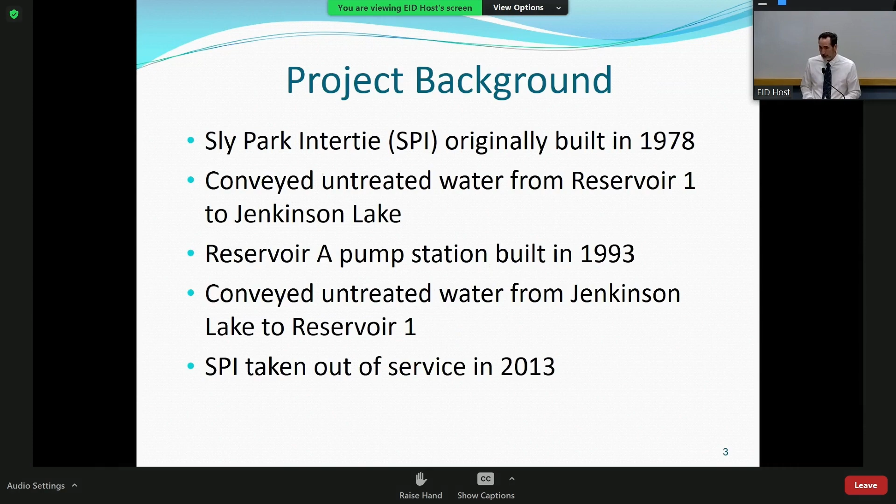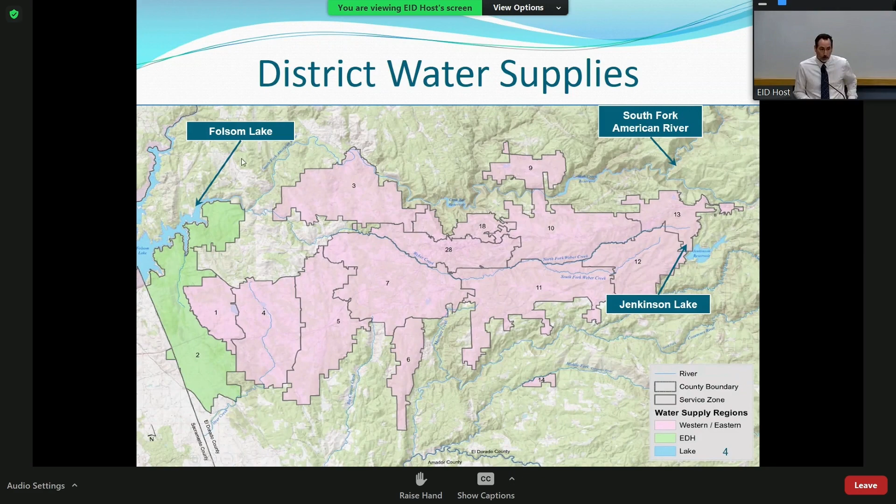The Sly Park Intertie is one of only 3 major pipelines connecting the north and south transmission systems here. It's also located on the furthest east and the highest elevation, which allows for the most flexibility and efficiency in delivering water. The SPI project would reestablish the connection between Reservoir 1 and Reservoir A, and this goes a long way for efficiency and supply throughout the entire system.

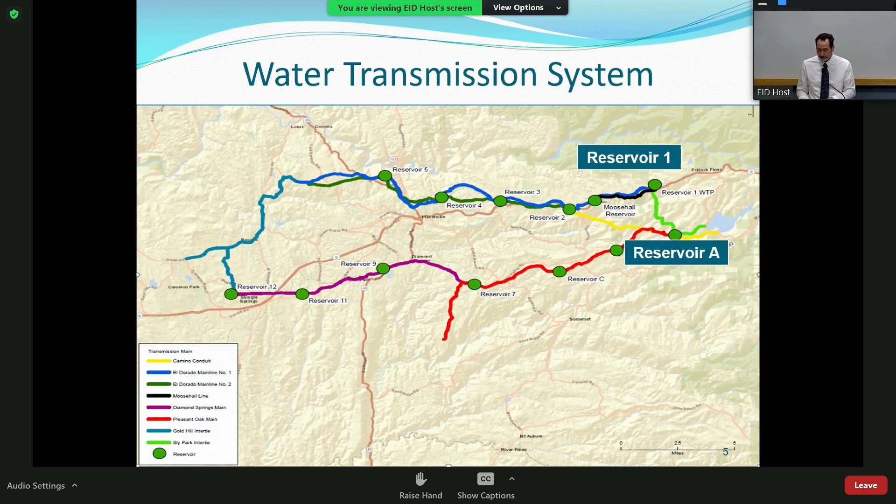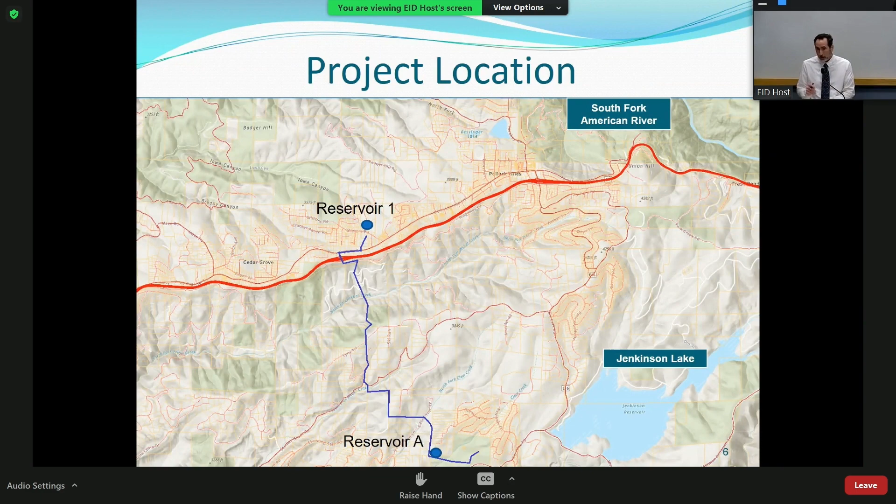Reservoir 1 is located in Pollock Pines off of Pony Express Trail, and Reservoir A is located below Jenkinson Lake off of Sly Park Road by the U.S. Forest Service Sierra Springs Fire Station. It's approximately 6 miles from Reservoir 1 to Reservoir A.

Next slide, thank you. The project objectives are to improve drinking water reliability with a bidirectional pipeline, provide uninterrupted drinking water supply during an emergency or a scheduled plant shutdown. This means that Reservoir A or Reservoir 1 will be able to supply the entire system. Reduce energy by maximizing gravity flows and utilizing new high-efficiency pumps. Lastly, to improve water quality and reduce the scale and cost of water quality treatments.

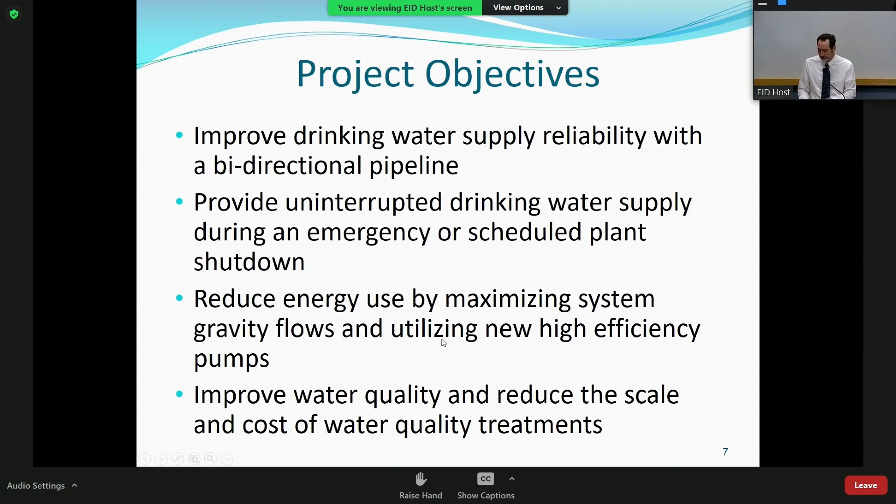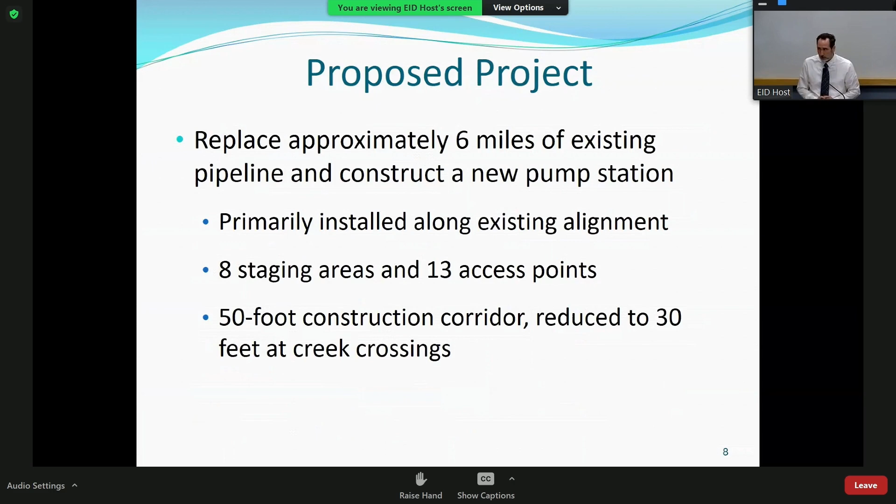The proposed project would replace approximately 6 miles of existing pipeline. It would be primarily installed in the existing alignment with 8 staging areas and 13 access points. The construction corridor would be approximately 50 feet wide, that's 25 feet on each side of the pipeline, and that would be reduced to 30 feet wide, or 15 feet on each side, over creek crossings.

Segment 3 at the bottom of the map is located entirely within the Reservoir A facility, which includes the new pump station. Lastly, segment 4 is the last half mile of the project from Reservoir A up to the distribution system by the Sly Park Environmental Education Center.

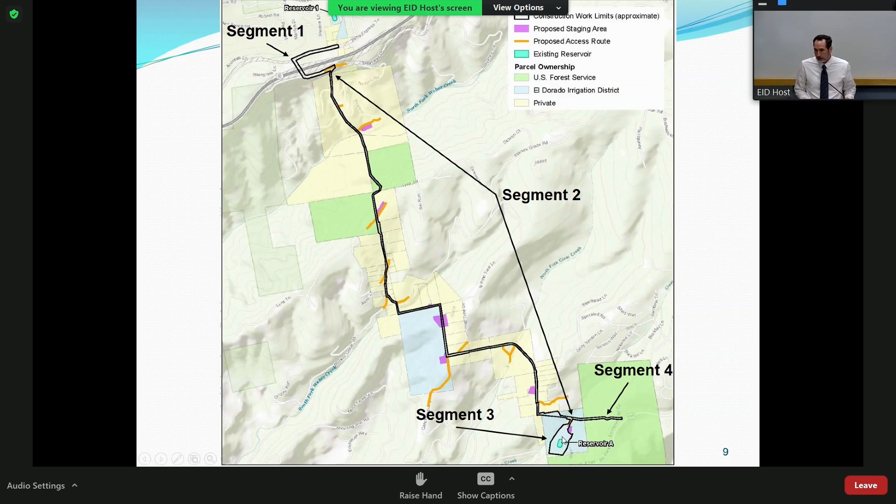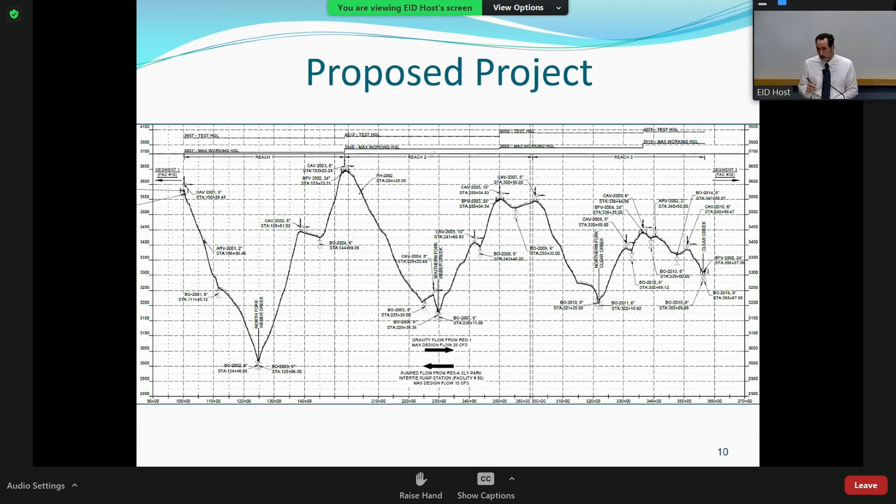Typical construction sequencing would involve removing the vegetation. The old pipeline would be excavated and removed. The new pipeline would be placed in the trench with new bedding material. The trench would then be backfilled and compacted and restored to original contours and reseeded for ground cover.

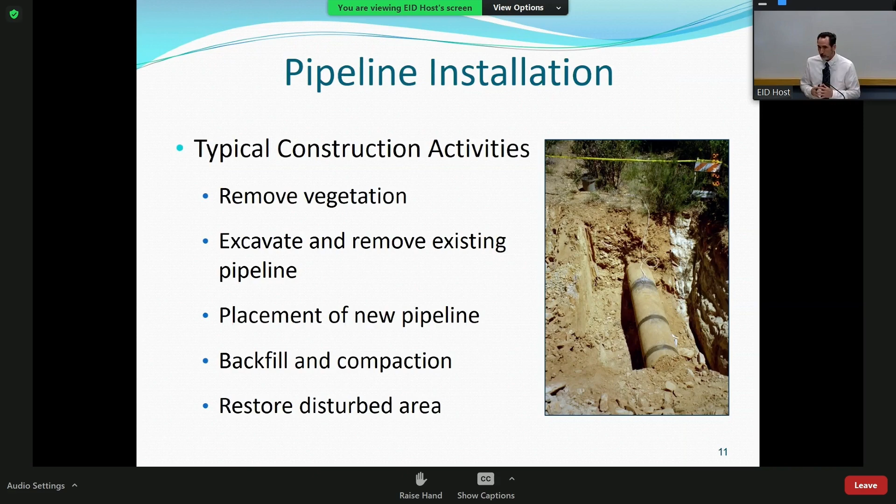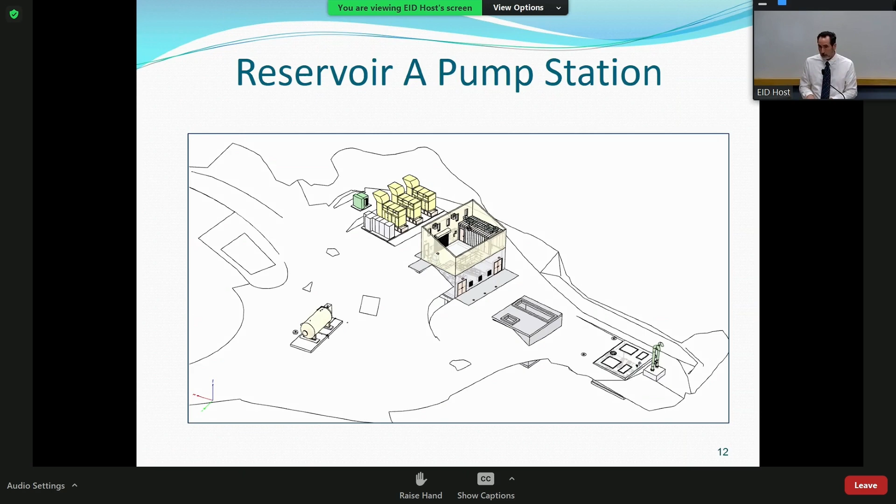As I mentioned before, Reservoir A is about 450 feet lower than Reservoir 1, so we're going to use new high-efficiency pumps to get that water back up to Reservoir 1. Additionally, there are backup generators to provide power in cases of planned or emergency power outages.

The project is scheduled to start this summer, and with typical pipeline construction advancing 120 to 160 feet per day, that would get the project completed substantially by the end of 2025, with pipeline testing and then placed into service in 2026.

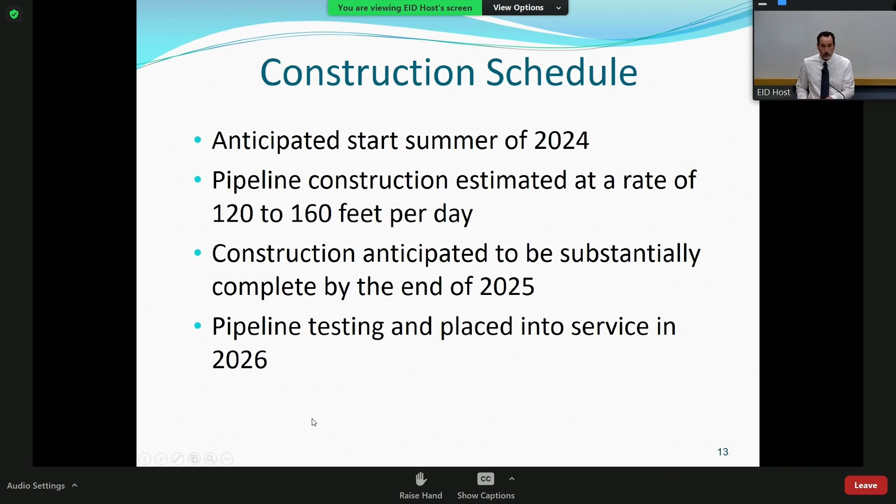So that's the brief outline of the project and overview. We're now going to move on to the environmental review process. The California Environmental Quality Act, or CEQA, is intended to inform decision makers and the public about potential environmental effects, identify ways to prevent, avoid, or reduce those significant environmental impacts, and foster public participation and promote interagency coordination.

The CEQA review started over a year ago, with a notice of preparation to solicit input from the public and public agencies on the scope and content of the EIR. We had a public scoping meeting on February 15th, 2023.

Then this January, we released the draft environmental impact report for a 45-day public review and comment period. We also had a public meeting to get input from the public on February 7th. The notice of completion for the final environmental impact report was released just a couple weeks ago, on March 27th.

The district has had ongoing public outreach throughout the entire environmental review process. We have sent out notifications to local residents, met some local residents at their homes and property to discuss the project directly with them, and had public meetings to discuss the environmental documents and get input.

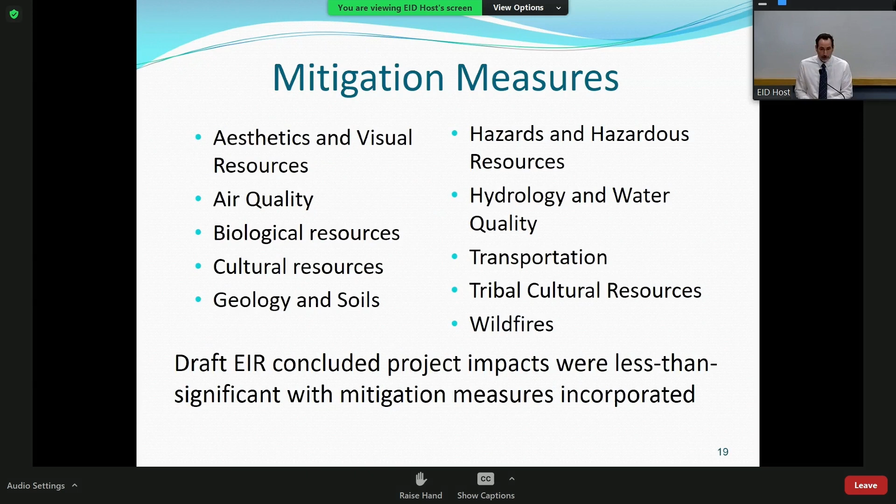The draft EIR also included a mitigation monitoring and reporting program, or MMRP. This MMRP identified specific measures and the timing of these mitigations for each of the impacted resources. The draft EIR concluded that project impacts were going to be less than significant with these mitigation measures incorporated.

So the district received 5 different comments during the 45-day public review period. We received 1 comment from the California Department of Fish and Wildlife regarding biological surveys, plans and impacts, construction personnel training, and mitigation measures. We also received 4 different comments from adjacent property owners, regarding construction noise, access, traffic, and duration, and biological impacts and fire protection.

The final EIR for the project includes the comments received and any changes made to the draft EIR. District staff reviewed and carefully considered the comments received on the draft EIR, and a response to each comment is included in that final EIR.

It was determined that no significant new information was received with the comments, therefore no substantial changes were made to the draft EIR. The final EIR also includes any revisions to help clarify the language in the draft EIR, and it includes the MMRP, which describes how the project implementation will go and how those mitigation measures will be recorded. Lastly, the final EIR affirms that there were no changes in the findings or conclusions of that draft EIR.

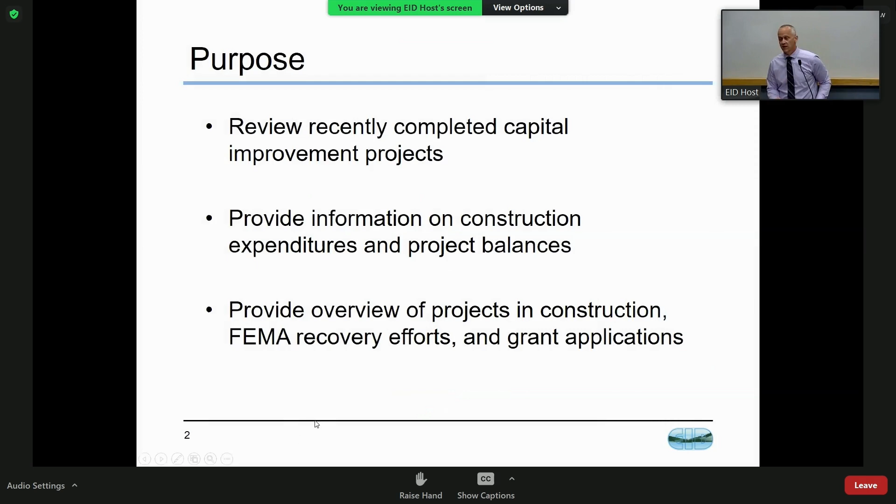So today we're going to review a couple things. First, a review of recent completed capital improvement projects, as well as a summary on the expenditures and project balances for those projects. Then we will also provide an overview of projects that are ongoing and in construction, as well as a brief summary on FEMA recovery efforts and ongoing grant applications.

This is a summary of the projects that we have completed to date, or at least since our last report to the board. In total, that's about 4.7 million in construction dollars.

Over this period we have performed quite well. We are averaging about 2.2% in change orders, which reflects the diligence of engineering staff. You'll notice the change orders vary quite a bit - there's one that's fairly large, and change orders vary by complexity, budget, and location of the project. That one where you see a 22.5% increase in change orders was in one of our wastewater treatment plants - we'll get to that as we get down the road. But typically we expect change orders. Staff plans for up to 10% when we come to the board. One of our consultants thinks that anything under 8% is a grand slam. Again, it depends on if we get into existing utilities and a busy site - the industry average can get as high as 15 to 18%. It really depends on the site and the budget and location of the project.

So I have a question about that. This particular 22.5% seems to me, as a red flag, and we have had problems before. So you said this is completed now? It is completed. So when we get to that item, I'll discuss and give you some background on where we ended up with that increase in change orders. Okay, you will explain that. Absolutely. Okay, thank you.

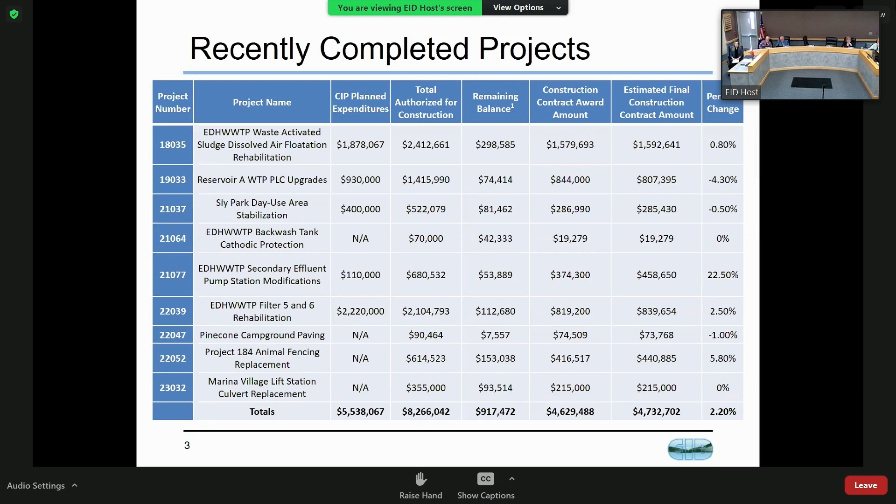So moving on to our first project. Next slide. I always like the acronyms that we use - so the El Dorado Hills Wastewater Treatment Plant, Waste Activated Sludge, Dissolved Air Flotation Thickener, you could lowercase DAFT. So this has been an ongoing project.

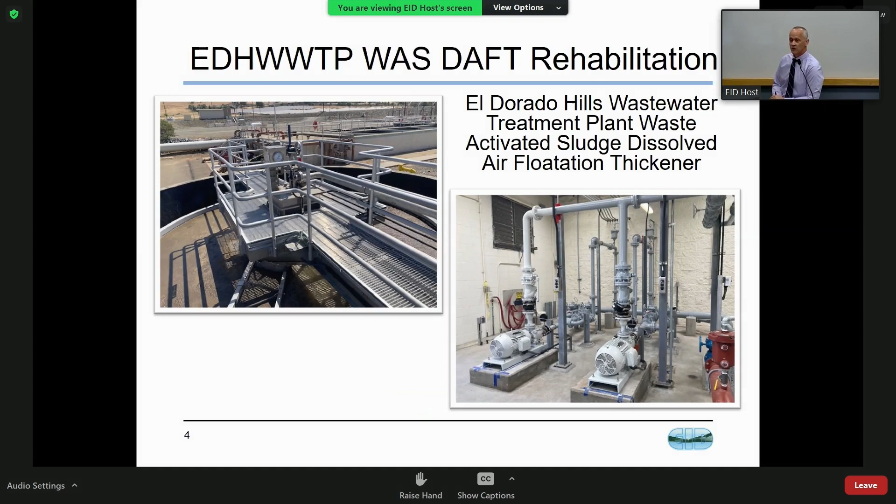So, next slide. Planned expenditures on this project was 1.8, almost 1.9 million. Total authorized for construction came back at 2.4 million. A lot of these costs you'll see are quite a bit higher than the planned CIP expenditures, and recently that's been due to general inflation we've experienced on our projects. One of the major drivers that affected this project and several others is the electrical cost - I think the electrical estimate came back almost double what the engineer's estimate was, and that's been pretty consistent across most of our projects.

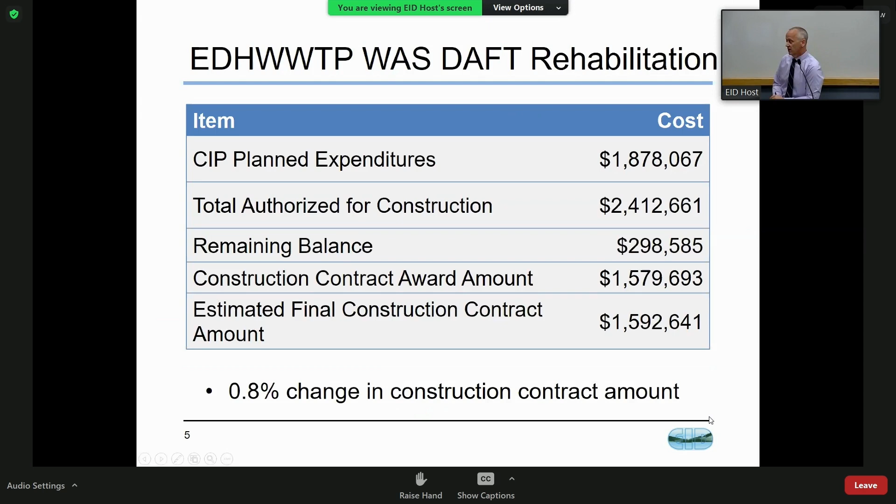That being said, we were able to manage quite a few change orders on this project with the contractor, and worked out some intricate details with that electrical system, and also a realignment of some of our existing facilities that were inaccurate on our as-built drawings. But regardless, we got to the finish line with about $300,000 still in contingency funds, and a total change order of just less than 1% on the project.

Next project, please. I threw in a couple of our smaller projects as well - some of these we don't necessarily come to the board with. I believe the Sly Park day use was, but you'll see two others that were authorized under the GM spending authority. The Sly Park day use area has experienced some pretty severe wave and boating action on the west shore there at Jenkinson Lake.

You can see in the top left-hand corner the condition of the existing shoreline prior to this project. Staff went out for a brief design and then received bids from 3 contractors to restore that, to excavate, stabilize the bank, and then place riprap. So you can see them mid-construction in the top right and the completed project there on the bottom.

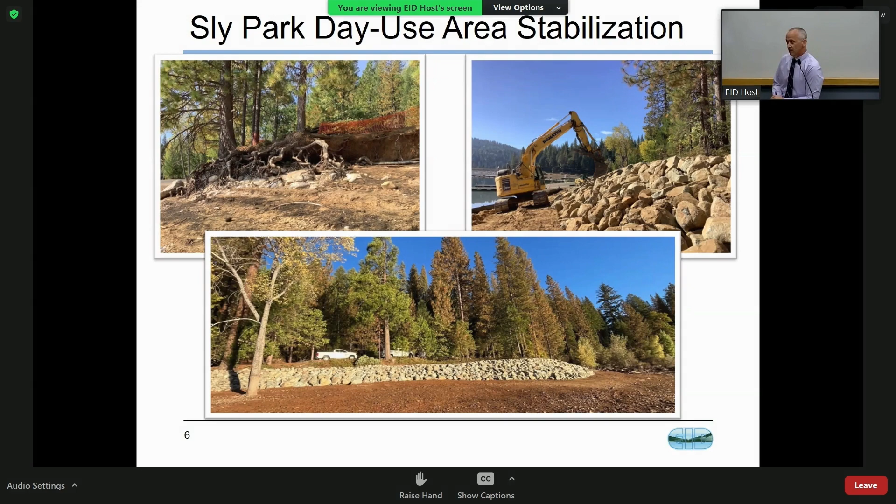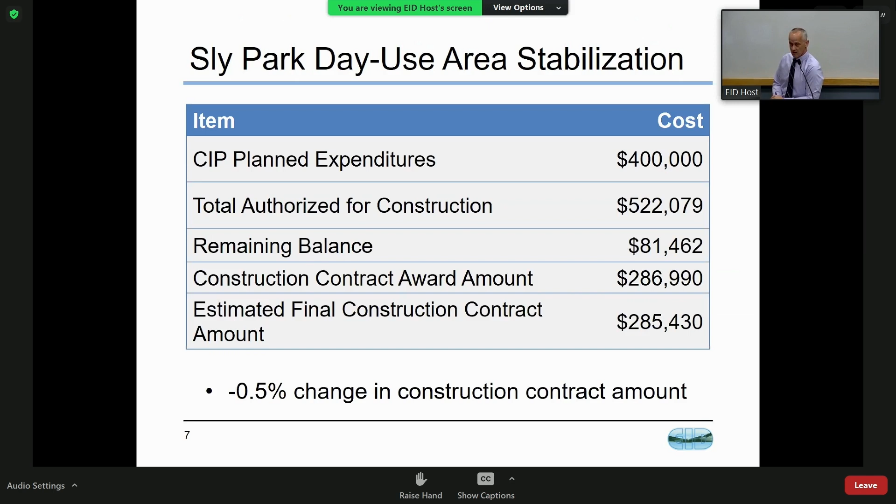Again, negotiating with the contractor, there were some minor site changes throughout construction, which actually reduced the bid price of this project by about 0.5%. So again, a pretty successful project.

I threw this one in again as it was not included initially in the CIP plan. It is included under our wastewater treatment plant ongoing projects. But I threw this on here because water supply is not the only branch of our services that have steel tanks. This is a bolted steel tank that is our backwash recovery from our recycled water at El Dorado Hills. Plant staff brought this to our attention in that when the tank was originally constructed, it did not have a cathodic protection system equipped on the tank. So again, we're trying to extend the life wherever we can of our facilities, taking whatever notes we can from our ongoing steel tank issues.

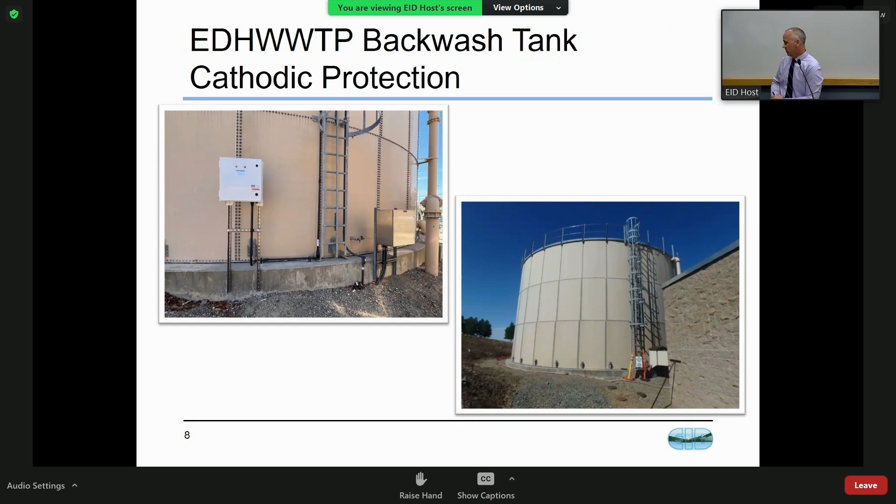So staff approached us, we received some initial estimates from similar projects, approached the GM under his spending authority to do a small design, and we were actually able to find a pretty economical solution. Genevieve, you can go ahead to the next project.

So we were planning on about $70,000 in repairs, and we were able to meet and identify a solution with a vendor for just under 20 grand. It came in exactly at that bid, so there are no change orders on that project as well. As we're looking to prolong our assets and come up with economical solutions, I wanted to highlight this project.

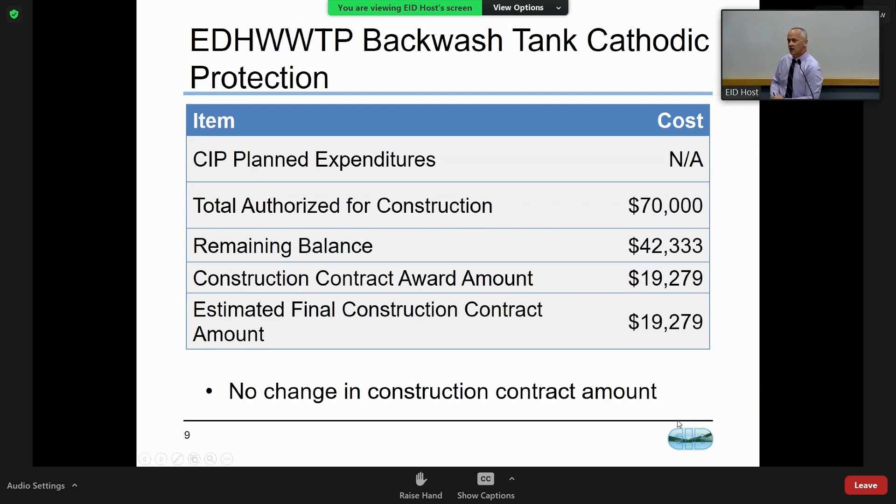Now for the problem child. This is the secondary effluent pump station modifications at our El Dorado Hills wastewater treatment plant. We had a couple issues go on when we were under construction on this facility. First and foremost, construction change orders fluctuate based on the scope, location, and complexity of the project.

What this was is the pipe you see in the bottom right - we were trying to expose this pipe and retrofit it with an air box so that it can release bound air from our secondary clarifiers during high flows. What was happening is the pump station just on the other side of this was getting airbound during high flow weather. That pump station pumps all of the flow for the treatment process, either to the storage reservoir or to our filter processes for recycled water or discharge to the adjacent creek.

So when that's not functional, we lose about - actually there are 2 pump stations - we lose half of our capacity to do that. Operations staff has to rent temporary pumps, and it really puts them in a bind when we get into those high weather flows. So definitely a critical project.

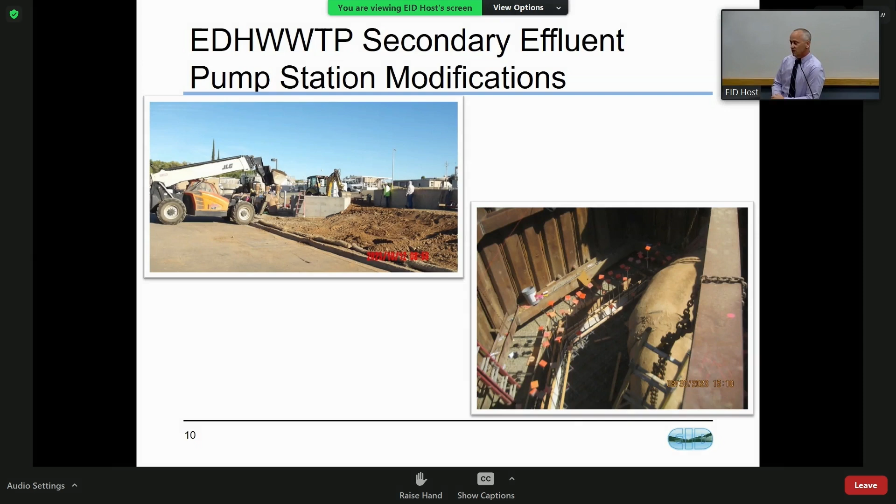So again, planned expenditures, we planned for just over 100,000. We saw a large escalation in labor right as this project was bid, and then another substantial change order of almost 80,000 for the rock pocket and changed site conditions once the contractor got on site. This is one we try to avoid, but given that complexity, industry averages for this project would be somewhere in that 10 to 18% range that you'd expect. So we're not too far off. However, we definitely want to continue to do better and get our records more in order.

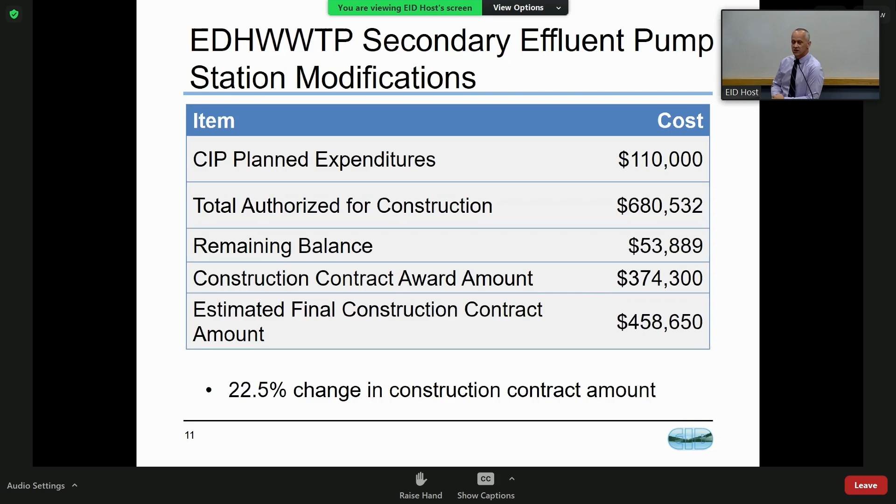Same plant, almost the exact same time, was the El Dorado Hills wastewater treatment plant filter 5 and filter 6 rehabilitation. I know Director Dwyer, I'm not sure if Director Anzini had been out there as well to see this facility.

I went back and looked at some of the photos on this. You've seen pictures of our tanks - this is basically an above-ground steel tank. The interior looked just like some of the tank pictures you've seen, where it was very corroded and degraded. So all new internals, all new epoxy paint. Really ended up being a very nice product, and this should last for another 15, 20 years.

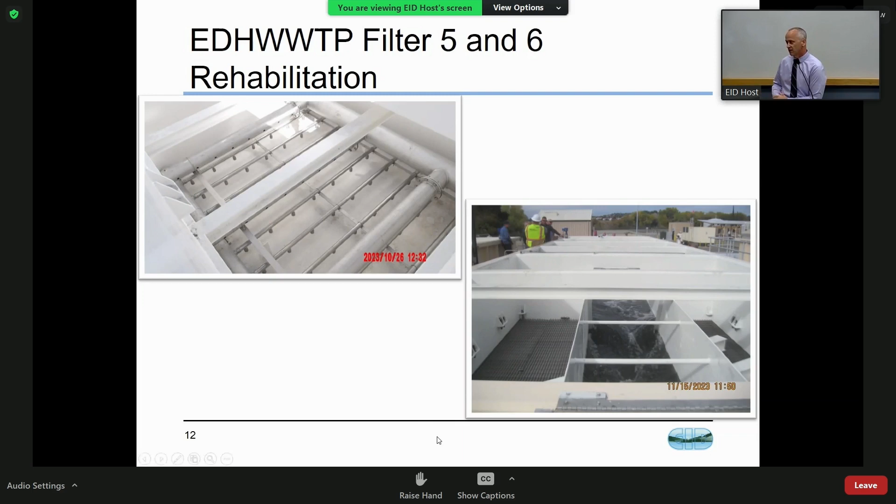We're going to do our best. So that's 2 out of the 6 - we still have 4 that we've got to program in and make sure that we at least do the recoating and possibly some of the internals as well, hopefully not on an emergency basis.

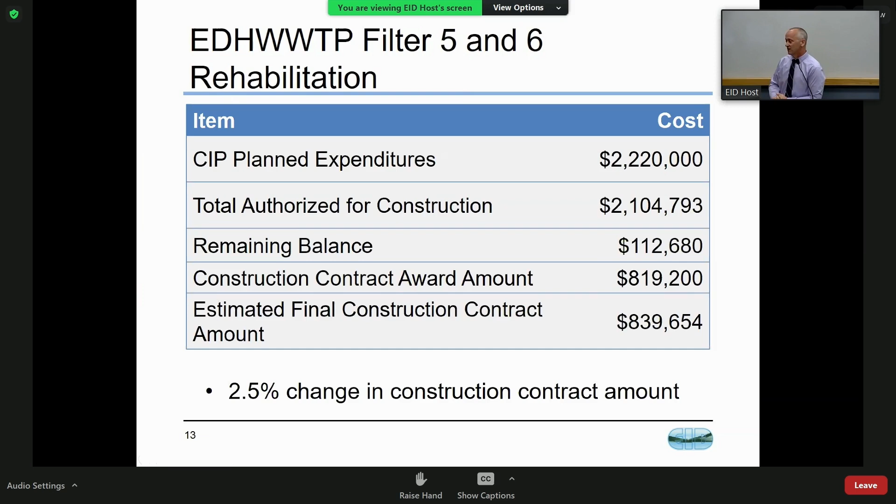Pinecone Campground paving - this is another project that within the first month I was at the district, I toured this one. The paved loop in the Pinecone Campground had significantly degraded over time - it was rutted throughout, with alligator cracking all the way through. So this was a project that staff put in to replace that paving.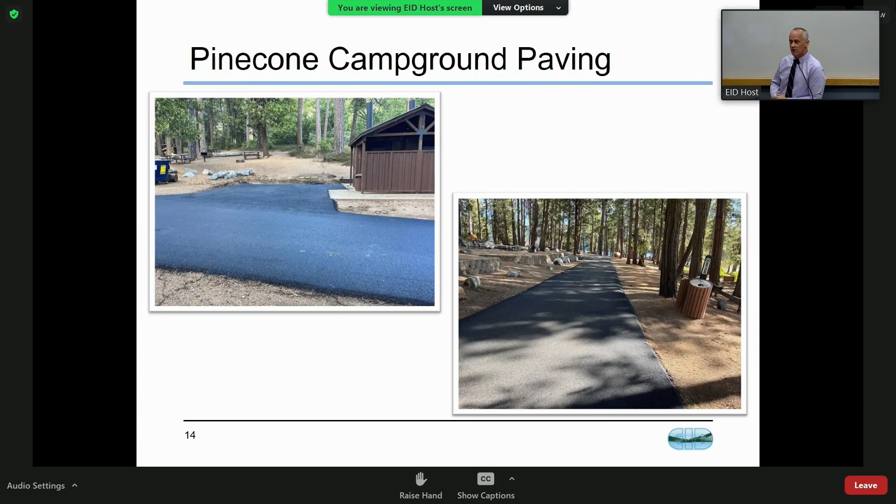We also upgraded the parking next to one of the restrooms there - you can see that in the top left - to make it ADA compliant, which it had not been in the past. So, pretty straightforward project.

And again, it came in right on budget. I think we had a couple deductions for what we planned to pave, and got us with a 1% under change order.

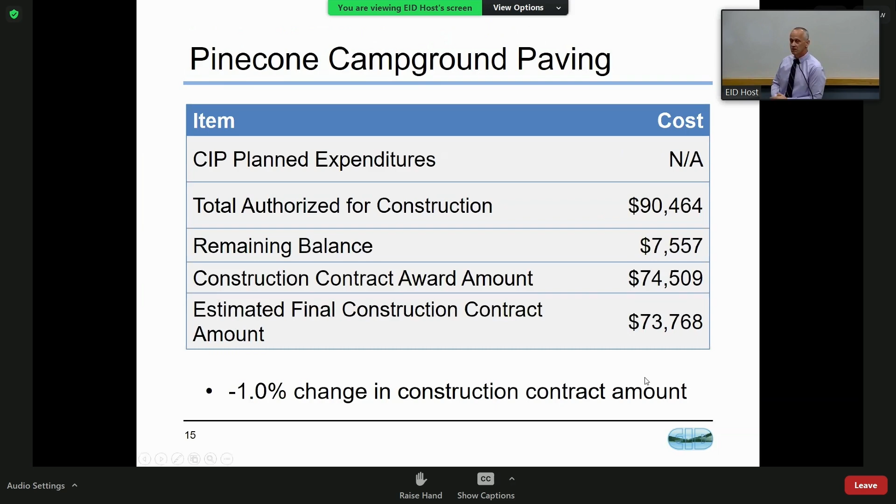Project 184, animal fencing replacement. There were several sections of our flume and adjacent fencing that were damaged during the Caldor fire. This is a FERC requirement that we maintain access fencing along the canal - I think there's about 1.6 miles of fencing included in this project.

It's pretty remote, pretty hard to get to terrain, and I think we had a couple issues. You can see in the top - actually, there's the fencing right there. It's 6 foot all along both sides of the canal. This is in the Mill Creek or Bull Creek area of the flumes.

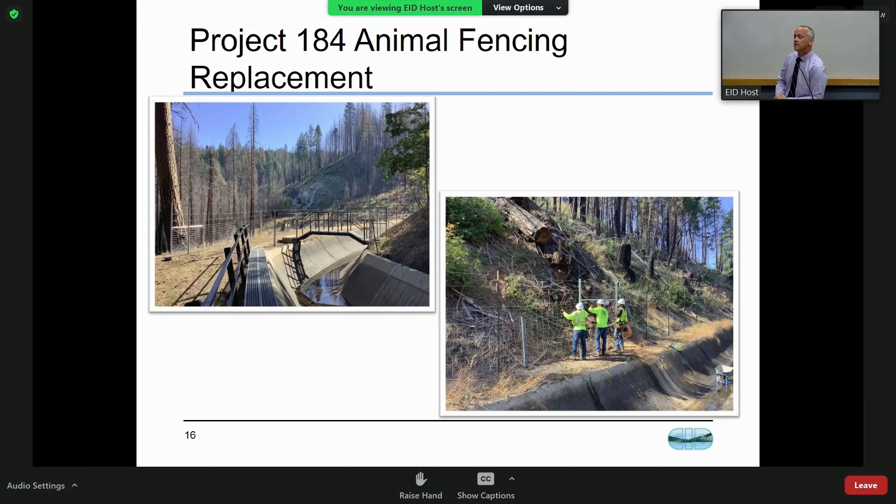Because the canal replacement - the damage done in the Caldor fire - is the cause that we had to remove some of the fencing to get access, are we using that as part of our insurance and FEMA recovery request for the fencing? It is, it is. So we will be pursuing reimbursement for this project as well, as part of that larger FEMA project - ongoing, it'll be a long time coming, right?

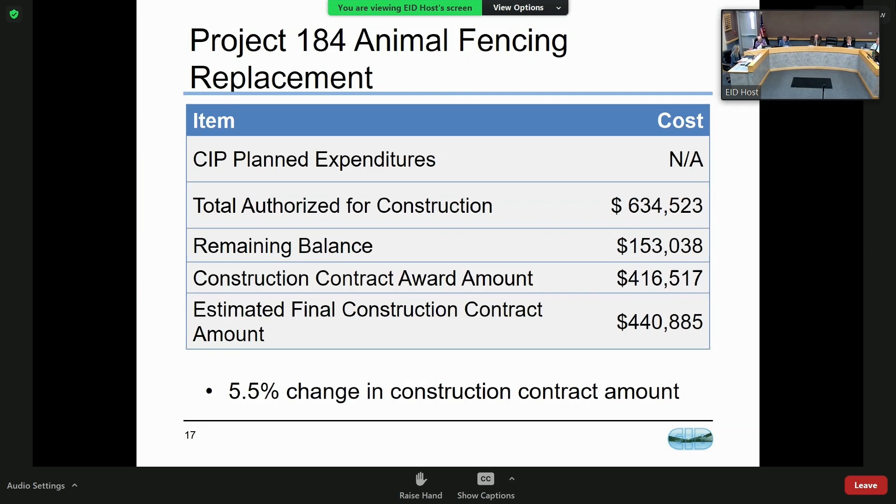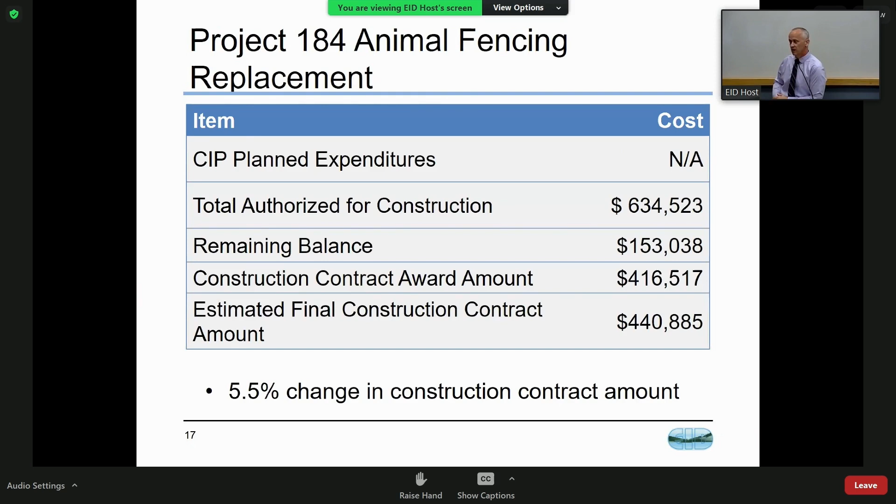Overall, there were some change orders on this project - I believe we added a couple animal crossings. It's hard to identify some of the changes in terrain until a contractor actually gets in there and adjusts how he's going to get the fencing to accommodate those, given the remote nature of that project. So that drove the change orders, and we came in just under 6% change orders that we will be pursuing reimbursement for.

Last project was the Marina Village Lift Station culvert replacement. In June, I believe, of last year, following the preceding winter storms, operations staff noticed some severe erosion of the upstream face of the culvert in the access road to the Marina Village sewer lift station. At the time, it had eroded up to about 8-10 feet along the 48-inch culvert that spanned this road.

The gravity line that went into the station was completely exposed and kind of hanging there in the air. So it really was a huge liability for the district. Staff issued an emergency contract, given the timeline before this year's storms, in order to get it done with SRC.

We bid the project, and I don't believe there were any change orders on this project. SRC was able to get in very quickly. You can see this was a pretty complex project.

The picture on the right shows those two I-beams holding both the 12-inch pipe that drains into this lift station, as well as the 12-inch force main that pumps out of this lift station, which remained active while we completed this project. Instead of the 48-inch corrugated metal pipe, which usually has 20 years of life, and I've seen as little as 10 or 12 years, we replaced that with two concrete pipes to hopefully give us more like a 50 to 100 year life on that access road and culvert structure.

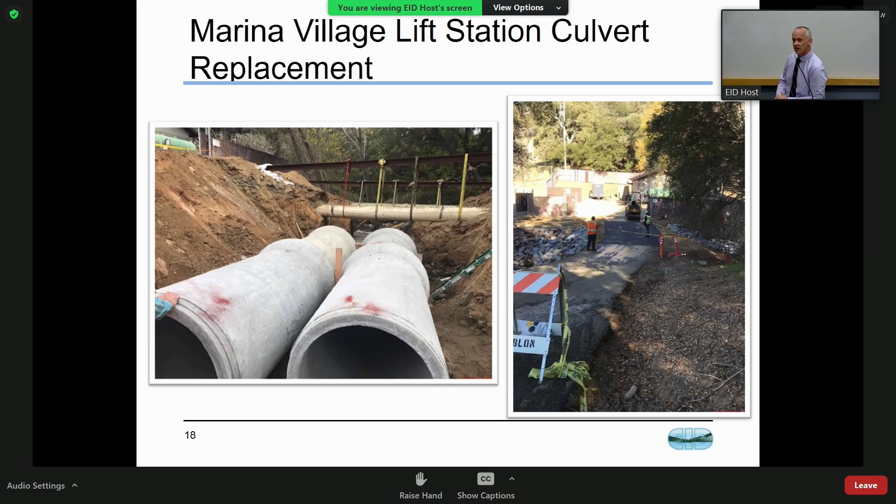Unfortunately, this project is not covered by FEMA or insurance because it's a road access issue, and that falls within different reimbursement buckets. But go ahead, Jen, next slide.

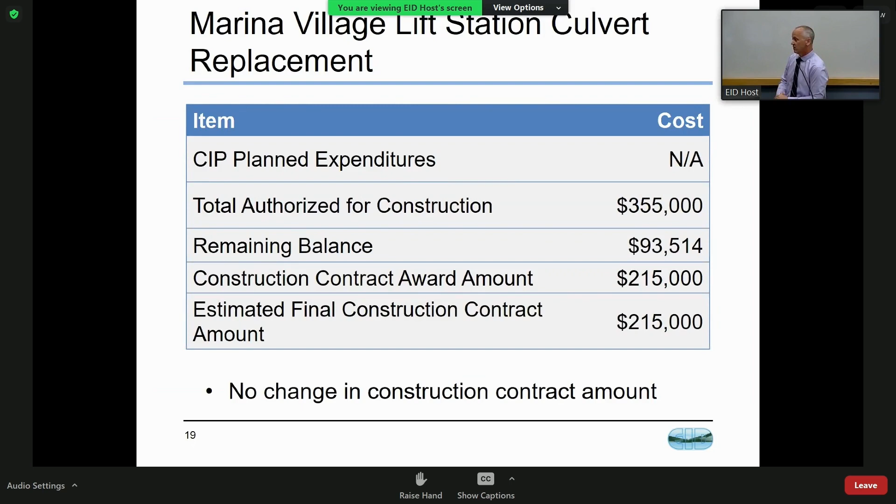Again, given the complexity of it, I think we got a pretty decent price, and no change orders on that project. So completed on time and within budget.

Following up on our active projects, staff is currently assigned 90 CIP projects, which is a pretty heavy workload for 6 engineers. Of those projects, approximately $70 million has been authorized by the board for funding. These are multi-year projects, so they don't necessarily correspond with our CIP plan and the annual budget, because they kind of roll from year to year. They include studies, basic design, construction, and equipment procurement, so all that's kind of wrapped up within those projects.

Specifically, out of those 90, we have 7 that are nearing completion. I would anticipate they'll be complete within the next 3 to 6 months, and those projects have a total authorized budget of $30.5 million. So we'll review those in the next couple slides.

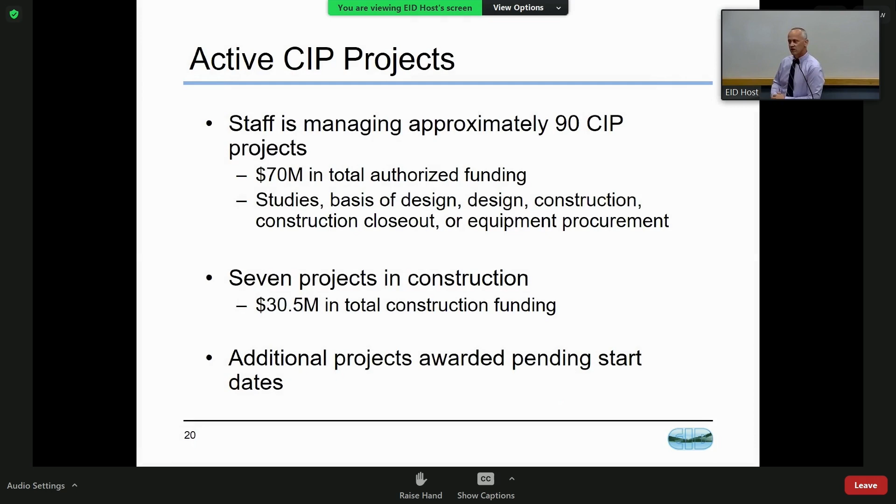There are additional projects that have been awarded and will be going into construction, such as our FEMA generators, Kipple Lake Well, or the campground well. Those are not included in this, but will be as we start or proceed to construction, as we start the next update.

So the largest of these next projects is Motherlode Force Main Phase 3. Again, this was an emergency project to replace the sections of Motherlode Force Main that carry a good portion of the outlying areas of Placerville down to El Dorado Hills, to our Deer Creek wastewater treatment plant.

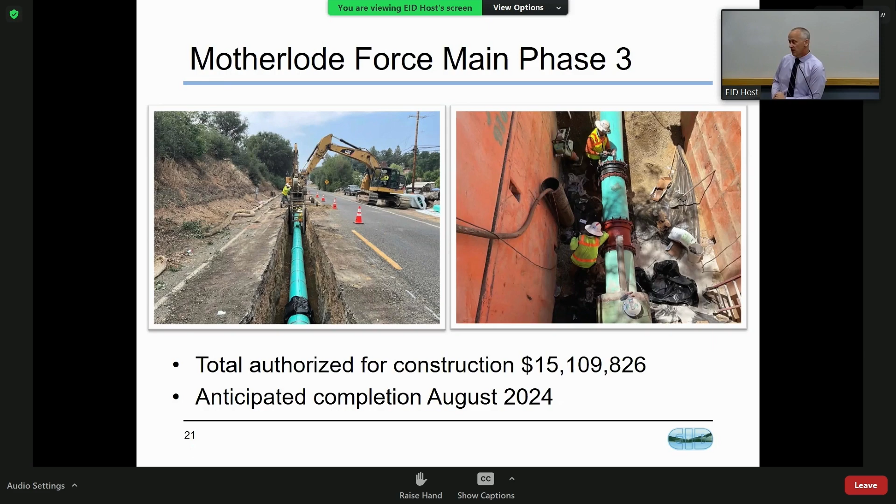This is composed of really 3 bridging projects along that alignment. I believe Phase 3A and 3B are 100% complete at this time. Paving still needs to occur on those two sections, and Phase 3B needs to also be tied into our system. The contractor will be mobilizing in the next week or two to work on Phase 3C, which is approximately 50% complete. We're anticipating the contractor will be wrapped up with tying everything in and final paving probably in August of this year.

Today, yeah, I wasn't sure if it was this week or next week. Again, that's been a really good partnership with Teichert to date.

Forebay / Drop Off Road waterlines. This is actually 2 different water line sections, the Forebay water line and customer service lines, which were completed last year. However, final paving for that segment has not been completed. We're waiting on warmer temps so we can get up there and pave per project specifications.

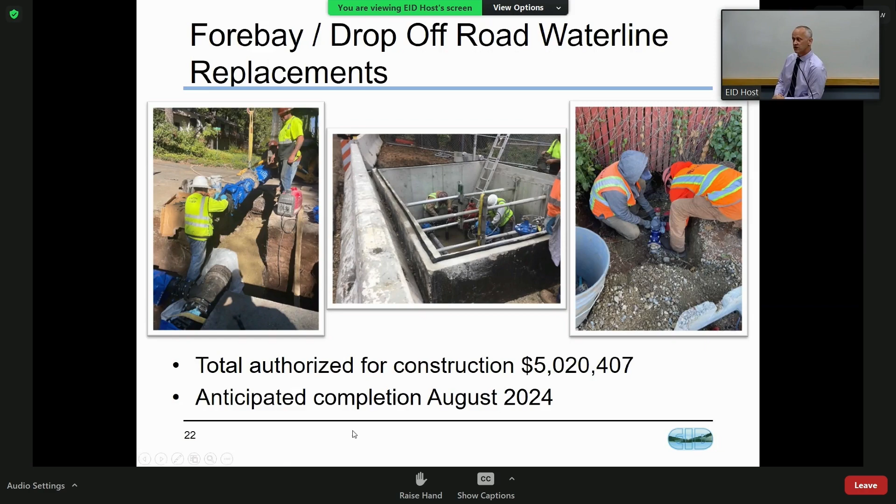Drop-off road, we're in kind of the same boat. I think Fair Camp is going to be out there either this week or next to start mobilizing on that project as well. So kind of the same timeline, we're anticipating about August of this year. We should finish up that second pipeline section and be done with that whole project.

Bass Lake Tanks, been here a couple times on this project. This project was actually supposed to be complete at the beginning of this year, January, February. The contractor, so there's tank 1 and tank 2 - tank 1 interior was completed in a previous project. This project includes tank 2 interior coating, exterior coating, and the exterior of tank 1, as well as quite a few structural repairs. So the structural repairs are complete.

The tank has been primed. The contractor has really struggled with the epoxy coating they've used, so we've been actively pursuing that with our on-site inspection. They've had to strip it a couple times, so we're making sure that they do a complete coating and that it meets all the specs. So it's been a bit of a slog, but they are making progress on that and expect to wrap that project up likely in June or July of this year.

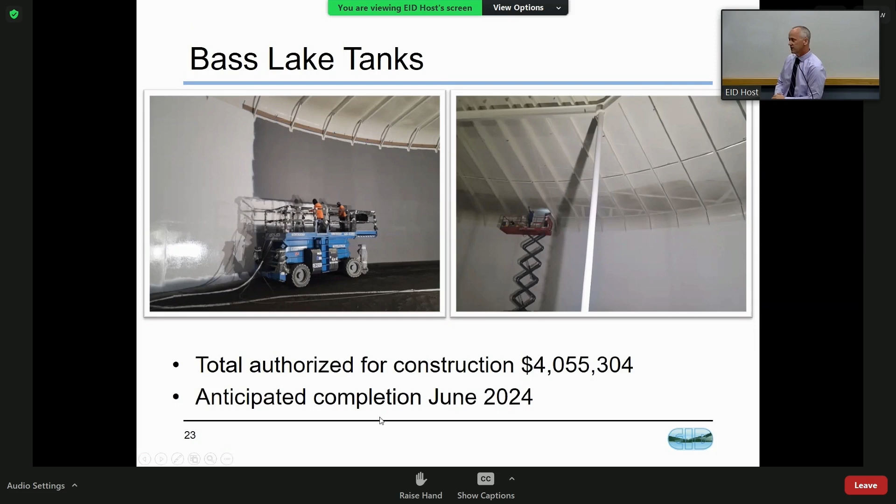Reservoir A filter valve—we were just here, I think, two board meetings ago for some additional funds on this one as well. This is a project to replace all of the intake valving for each of the filter basins. You can see the valves there in the top right picture, and kind of where that valve is seated right there in the middle bottom portion of the left-hand photo. This project, again, has had quite a few difficulties in that our as-builts were not as constructed.

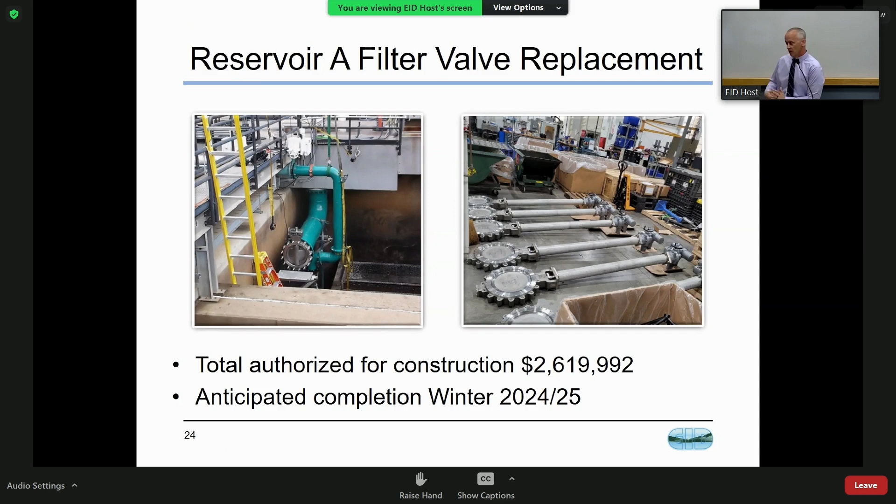There's also been—so anyhow, we're complete with 2 of the 3 filter clusters. We've also had some complications with the filter media project that was ongoing at the same time, which restricted some of the site access for this project. Staff has—the contractor has pulled off of this project and will finish the 3rd cluster of filters as demands drop this fall. So we'll be wrapping that up probably early winter of this year, or it might bleed over to the very beginning of next year.

And then Echo Conduit—this project, again, is substantially complete. We really kind of bent over backwards last year to make sure that it was functional so that we had some operational flexibility for this year, depending on how the weather and winter shook out. The contractor does need to remobilize to incorporate some safety features on this project, some rockfall netting, as well as some restricted access across the elevated section. And then, most importantly, they've also had to pull out the crane pads that they've used to construct this site and demobilize. So we do anticipate coming back to the board for a change order for some of that work.

Again, the contractor hit weather as we were trying to get that operational. And there's always a charge when you have a contractor demobilize from a site and then have to come back in—they've got to take all that trucking and equipment mobilization has to be paid for. So on a positive note, regarding insurance—our insurance claims—we received our first insurance claim on this on Thursday for, I think it's $940,000. So again, we are pursuing a full reimbursement for insurance on this project. All in all, I think it's a successful project for the district.

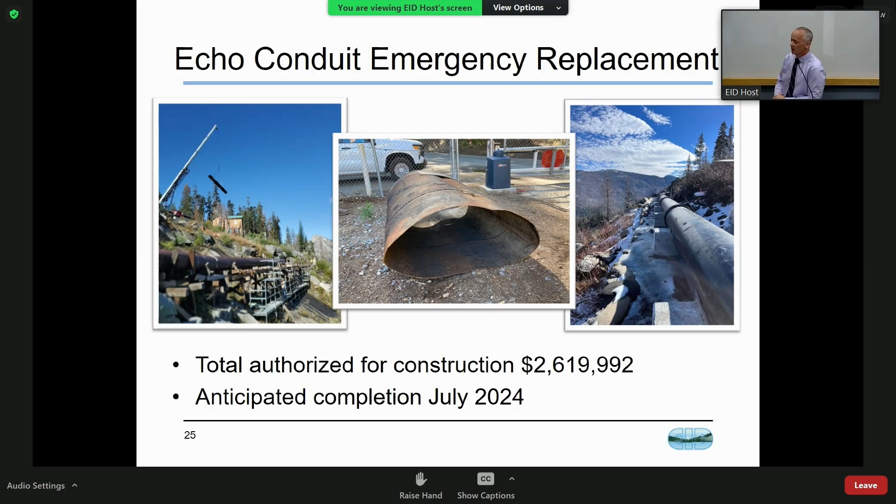Absolutely. And so, another thing—just being diligent—I was talking to Jackie Noel, our insurance adjuster, or our claims—what is Jackie's title? Risk analyst. And so we are not only going for the reimbursement costs, but there's also a chance there's some lost revenue from this, because we use that water—we divert it over to South Fork of the American for power generation. So we'll be looking at that as well to make sure that we're whole from this project.

Just a comment—I've walked some of that pipeline, and it is an extremely hazardous place to work. You could fall off a long ways if you're not really careful. So whatever they have to do to ensure safe operations is well worth the money. Absolutely. I mean, again, projects like that are, I think, what attracts a lot of staff working at the district—it's very unique. I don't know that many people have had the opportunity to work on the side of a cliff overlooking Lake Tahoe. It's pretty fantastic. At the same time, there's cost for working in environments like that.

I think we have two more. The 2022 collection system rehabilitation—and again, this is just to clarify some semantics here. The 2022 collection system rehabilitation, as identified in 2022, is designed and usually bid the following year in 2023, so it has a project number. I'm going to make it more confusing—it's 2021, but these are annual projects that we address deficiencies within our wastewater collection system.

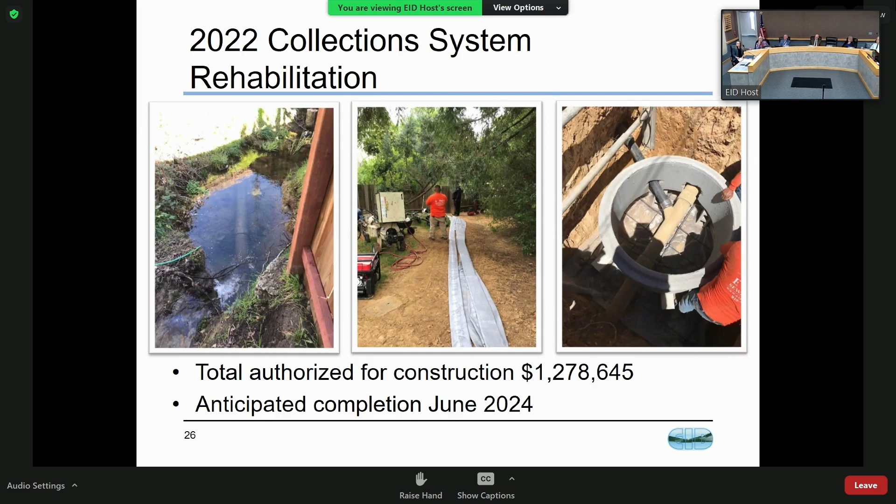We also provided a new generator for the site. I think the previous natural gas or propane generator had failed. And it also gave us a brand new power supply from PG&E so that we've got clean power and everything's standardized on the same power source.

I'm perplexed that we have the mandate to have the fish screen there, which is pretty expensive to build and keep in operational condition, to keep the fish out of the canal and out of the forebay, and then we turn around and stock the forebay with fish.

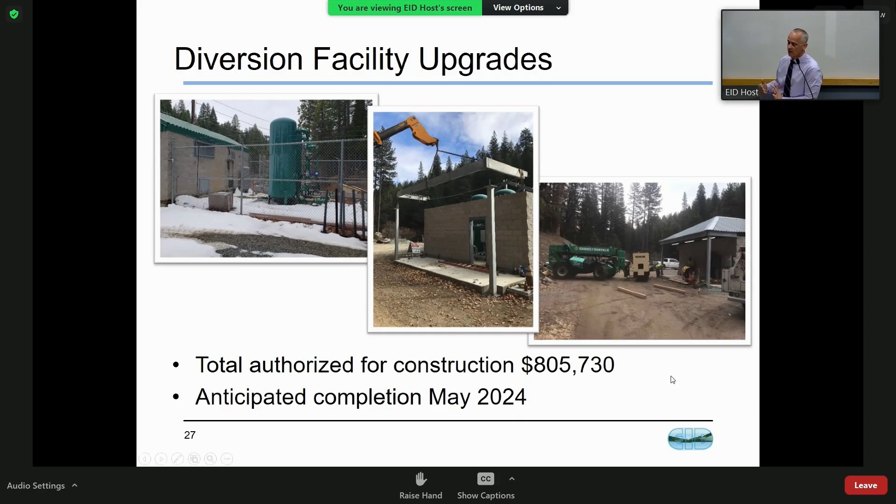I'd have to refer to Dan to give any specifics on what drives that policy. But regardless, at the end of the day, we have to meet our regulatory requirements. That's part of our FERC permit, same as the animal fencing we mentioned earlier. That actually really does serve a purpose in keeping deer and whatnot from falling in the canal. But if we wanted to hold back on some of those projects, we don't have that option. It's part of the permit. We just have to push on.

I will not comment on that one.

So again, summary of the project construction, we got about $30.5 million for those projects that I just summarized. We've got ongoing projects where FEMA generators are another couple million, and then we are intending to award the Sly Park Intertie here a couple weeks out. So we're keeping busy, trying to keep on track with our projects across the district.

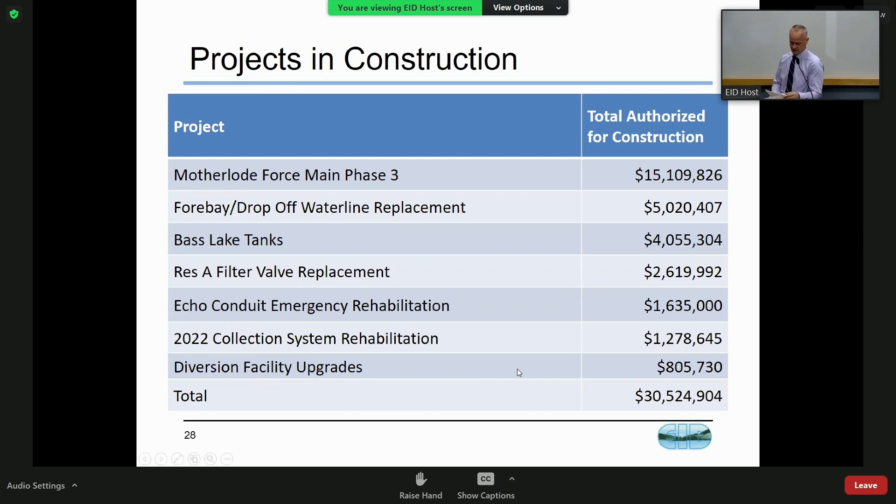Again, checking in on FEMA, as we alluded to earlier, we are still pursuing FEMA public assistance for both damage for the Caldor fire and the 2022-2023 storms. That process will be ongoing for probably several years now. We are also pursuing funding opportunities from FEMA in the form of their Building Resilient Infrastructure Communities, or BRIC grants, and Hazard Mitigation Grant Program, or HMGP.

We've been pretty successful in securing about $3.5 million in generators, which is under construction. We've also put in applications for assistance on our Flume 45 Section 3 project and Flume 48, and advanced assistance, which is basically technical studies for Flume 46, which is our longest elevated wooden flume section, on how we're going to tackle that and potentially get more grant funding. We've also approached them for both a BRIC and HMGP grant for replacing the floating covers at Reservoir 1 and Pollock Pines.

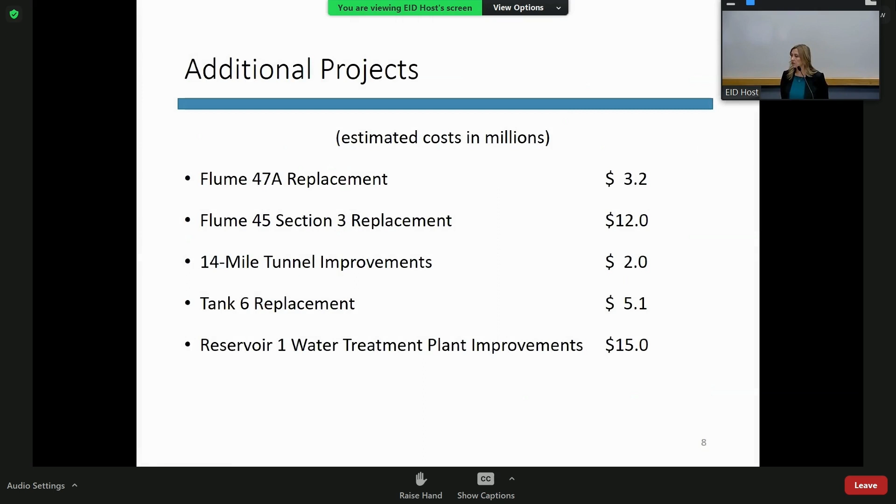So board options. Option 1 is to adopt a resolution declaring the intent to issue tax-exempt obligations in the reasonably expected maximum principal amount of $70 million for acquiring certain public facilities and improvements. Option 2, take other action as directed by the board. Option 3, take no action. Staff recommends option 1.

All right, is there any board questions? Alan? Based on our excellent bond rating, what's the current rate going right now for municipal bonds? We actually just recently had a meeting with the financial advisors and bond counsel, and currently it's about 5% that we're looking at. So depending on the next 6 months or so, what that's going to look like, we'll see.

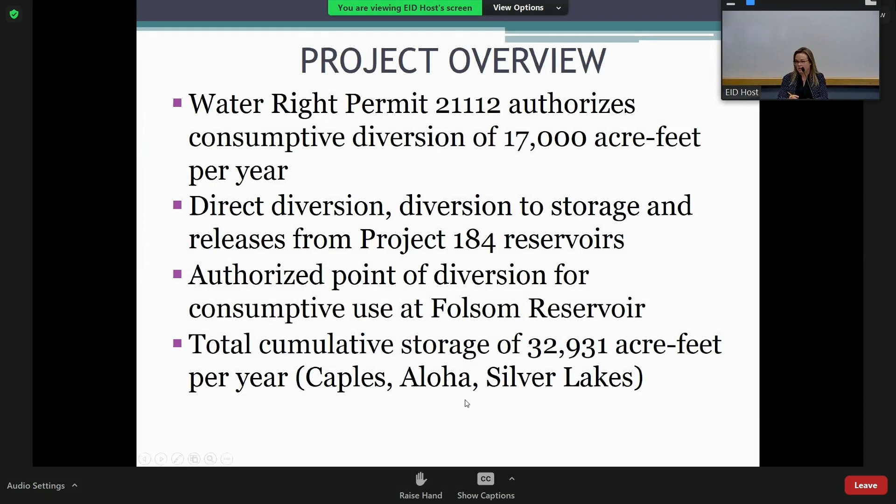What we are seeking to do is modify that existing water right, essentially to provide more flexibility for the district as we try to meet future anticipated water demands. We would like to add an upstream point of diversion at our existing El Dorado diversion dam for consumptive use purposes, as well as a place of storage in Jenkinson Lake, essentially to act as a kind of drought augment for those difficult years.

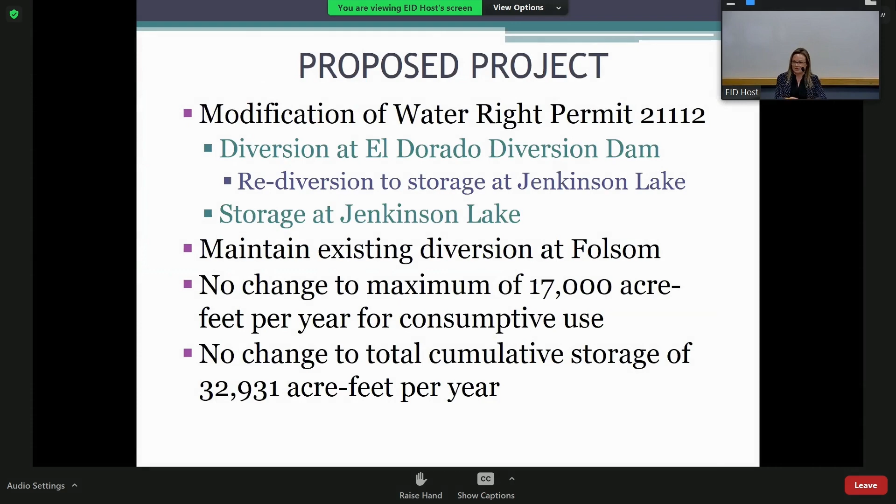We would maintain the existing diversion at Folsom. Importantly, from a water rights perspective, we are not seeking to increase either the maximum allowed use per year, nor are we seeking to increase the total storage allowed. So this is a flexibility and efficiency project. It's not an expansion of our water right, because we're not allowed to do that.

In terms of where we are seeking to add the point of diversion at El Dorado Diversion Dam, there are some efficiencies for this particular location. We do divert other water rights already at this location, so we would have the ability to utilize existing infrastructure. Really, I think of this as we have an existing straw. Currently, that straw is largely dedicated to conveying water for non-consumptive hydropower purposes.

However, as our customer demands increase in the future, we're going to need to shift some of the water in that straw from a non-consumptive power purpose to a consumptive purpose. Where you see the effect of that is that less water would be returned to the system in the South Fork of the American River below the powerhouse, because now that water is essentially being routed to meet our customer demands instead of flowing through the powerhouse and then being returned to the river.

Importantly, for this project, we are seeking the ability to store water in Jenkinson Lake. As we're all aware in California, often when water is available is not when we need it most. With the ability to store this water in Jenkinson, we would be able to divert during those high flow, early spring months such as we're in now, put that into storage in Jenkinson Lake, and then draw that down as we move into the peak summer demands.

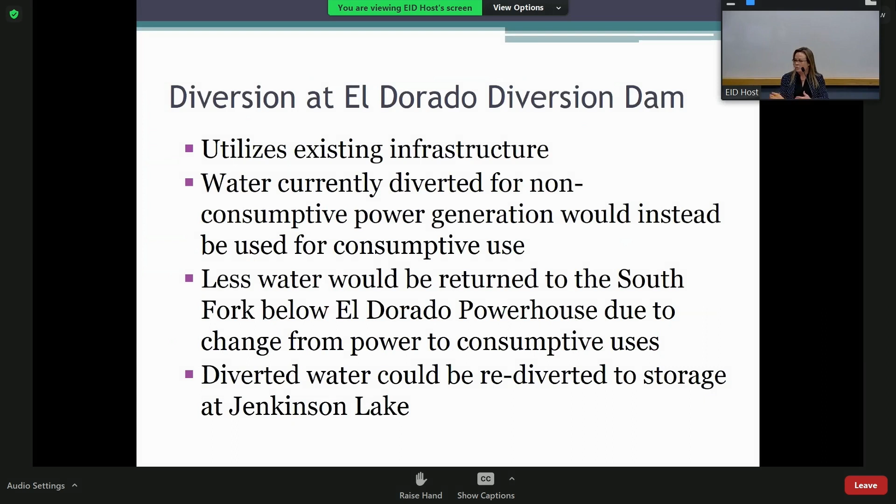From there, we would have the ability to route this water in two directions. It could either go straight through Forebay to Reservoir 1 water treatment plant, essentially to meet current demands. Or more likely, it would travel through the Hazel Creek Tunnel over to Jenkinson Lake for storage purposes, but it also would have the ability to float on top of Jenkinson Lake to meet Reservoir A demands instantaneously as well.

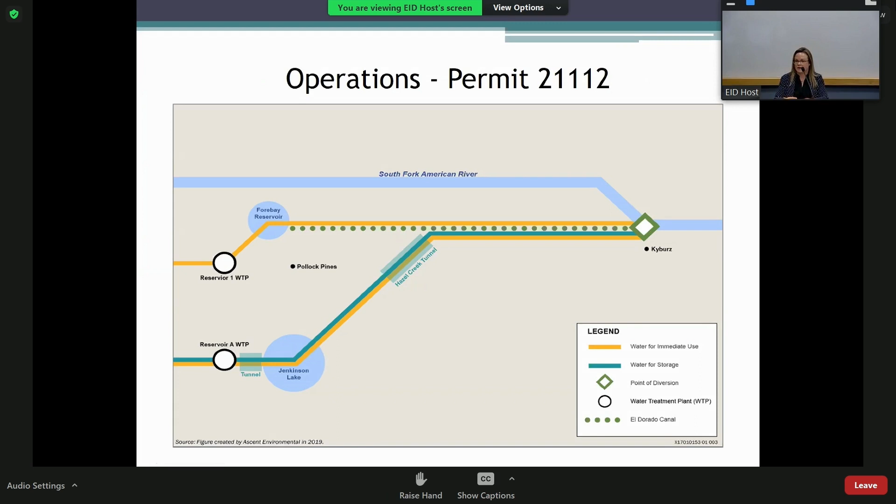I'll move on to what we've been up to in terms of the modeling effort as well as the environmental review effort. This is a very modeling-dependent project. Essentially with a water rights project, the question we have to answer is how will the system be affected hydrologically when we propose a change in terms of how we divert, where we divert, and what effect will that have on the system. The only way to answer that question is with extensive and costly modeling, unfortunately.

So we are doing hydrologic modeling as well as specifically temperature modeling. These are essential tools for any water right project such as this. They will directly support both the water rights change petition application process as well as the CEQA environmental review process. For this particular effort, we utilize not one, not two, but three modeling tools.

We have our essentially upstream model, which is the HEC-ResSim model. That models both EID's operations as well as SMUD's operations on the South Fork of the American River. The results of that model essentially feed into the CalSim model, which is more designed to model the operations of the Central Valley Project and State Water Project operations. And then those results are fed into a specialized modeling tool that looks specifically at temperature effects in both Folsom Reservoir cold water pool, as well as water temperature management in the Lower American River.

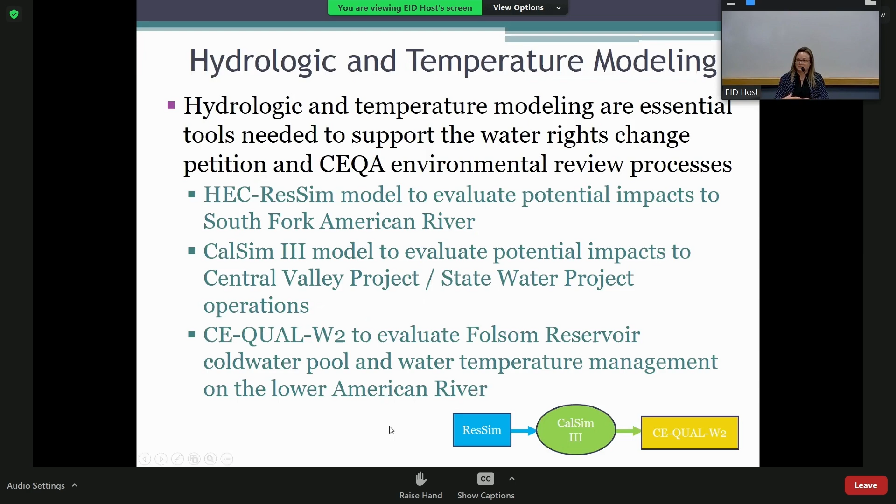I wanted to highlight, as if three models was not enough complexity, some of what is happening within these models. The model is fed 45 years of actual hydrology, so we have a modeled system of what the South Fork of the American River has experienced for the last 45 years. We then run different operational scenarios against each of those hydrologic years—how would the system behave in the 1976 drought with these operations, how would it behave in the recent 2014 and 2015 drought.

We run that against two baseline conditions. We determined we need two baseline conditions because we need to reflect both our current water demands and how we operate to meet those demands, but we also need to represent how we would meet future water demands even without the project—a future baseline, projecting our 2045 anticipated demands in our Urban Water Management Plan.

So we need two baseline conditions to compare, and then we compare both the proposed project operations as well as four project alternatives. You can start to see the layers of complexity building in terms of just how much work the model is doing to get us the information we need.

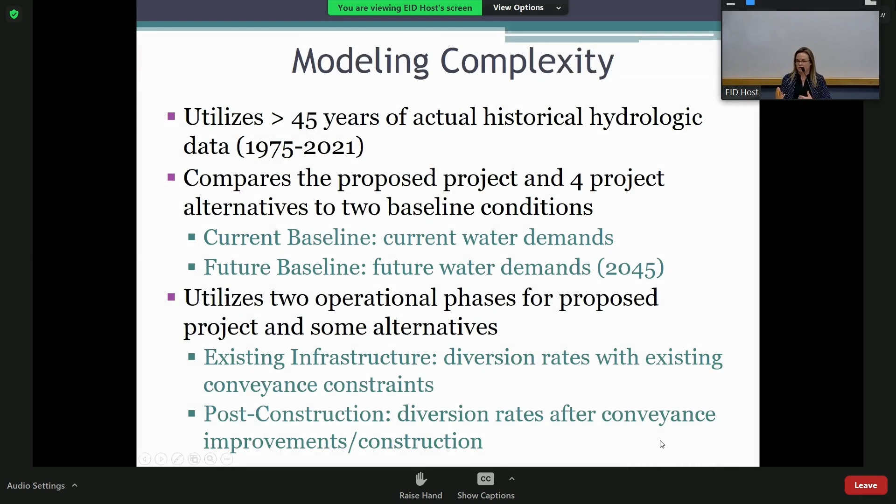So really we're trying to paint a very complete picture of how we would operate in all these different hydrologic scenarios, with both current and future water demands, and with either existing infrastructure or infrastructure improvements. So lots of layers in the modeling.

Before you go on, it seems like there's a couple things here. I always have a problem with using 45 years of data to model the next 200 years out, because we could be catching it on an upslope or a downslope. I guess that's just a general criticism of our climate modeling altogether.

The other question I have is, the El Dorado Water Agency is spending a lot of money on modeling the watershed. How closely do we fit into their efforts, or their efforts fit into ours? How are we coordinating these things, or doing them in isolation? What's going on?

Yes, thank you. We have coordinated with the water agency. I think they have a different project, so they're asking different questions, and making some different assumptions about build out, where development may occur, and where water demands may occur. So based on the fact that we have different proposals and different assumptions about what the future looks like, or even the timeline we're trying to address, we are definitely trying to coordinate, but we're kind of looking at different questions, so we are using different assumptions as well.

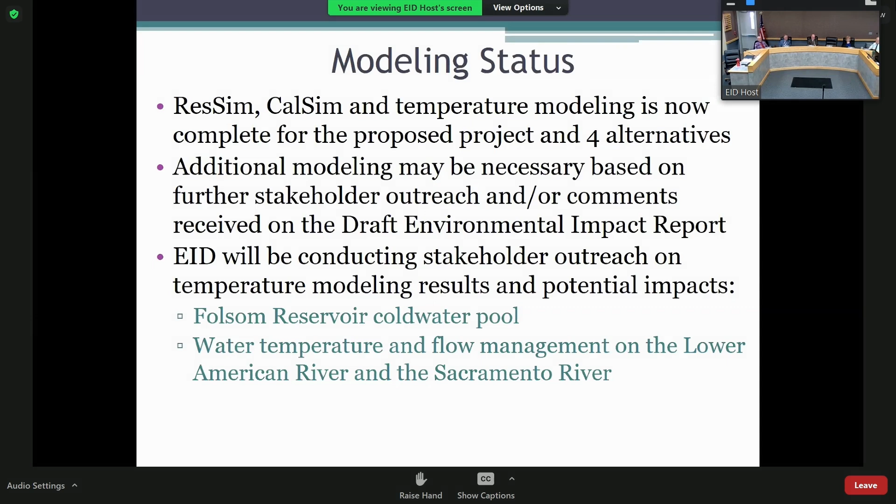Thank you. So I am happy to report that we are done with the modeling. I will caveat that statement by saying there may be some additional modeling we do, either in response to stakeholder outreach or perhaps comments received on the draft EIR once that is released.

But in terms of our effort to model both the proposed project and the alternatives, that effort is finally complete. We very recently completed the temperature modeling. Those results look very promising for the project, very little effect on the system -- we're not talking about a large quantity of water relative to the South Fork of the American River. So those results look promising, but we will be conducting specific stakeholder outreach now that we have the temperature modeling results, for those particularly interested in Folsom Reservoir and temperature management of the Lower American River. We wanted to make sure we had those results before that focused stakeholder outreach effort.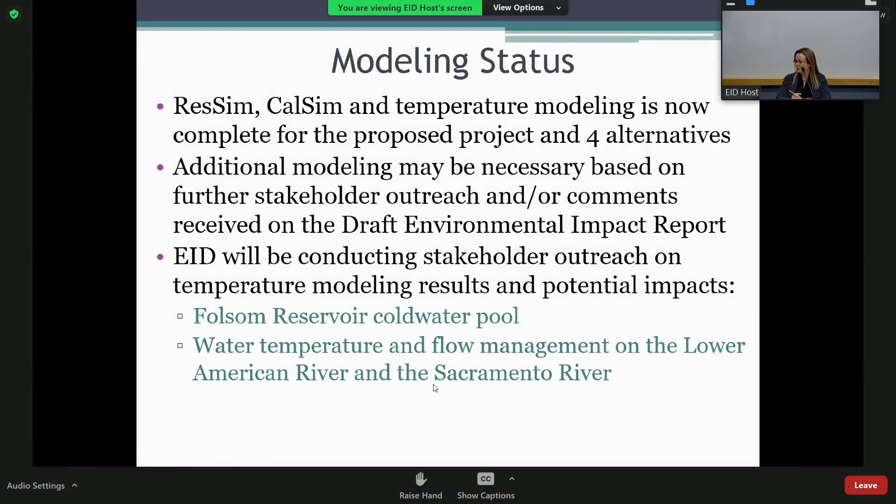Moving on to the environmental review -- we've been trying to advance the environmental review process concurrent with the modeling effort. As I've emphasized, the environmental analysis is heavily dependent on the modeling results to inform that analysis, particularly in resource areas often of the most interest in our area, such as hydrology, biology, recreation including whitewater recreation, as well as energy and hydropower effects. All of those directly rely upon the modeling we've been conducting, but we've been trying to advance the EIR as the modeling has advanced.

So we're well on our way with that, and we're currently forecasting release of the draft EIR in June of 2024.

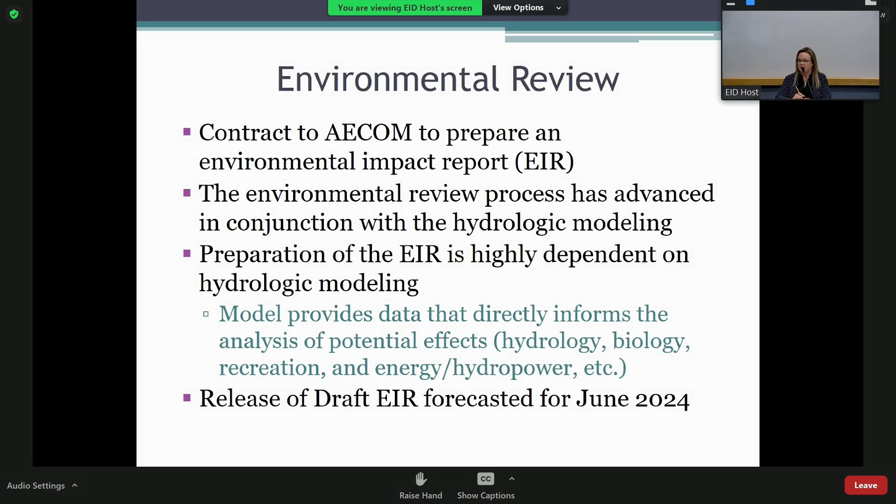And so I will now move on to the action of the day, which is the contract change order and funding request. Any additional questions on the status of the project before I move to that? Okay.

So the level of effort to review and integrate the modeling has exceeded our forecasts. There is a ton of data being processed and reviewed by multiple authors of these different resource categories. EIRs tend to be authored chapter by chapter, with a specialist authoring each particular chapter, so you have multiple authors having to chew through a very large amount of data.

In particular, the addition of that future baseline, the two operational phases, as well as additional project alternatives beyond what was originally anticipated, layered with the volume of data in the modeling, equals time. And time tends to equate to money. So we have found that we need additional time and resources to get the draft EIR to the finish line.